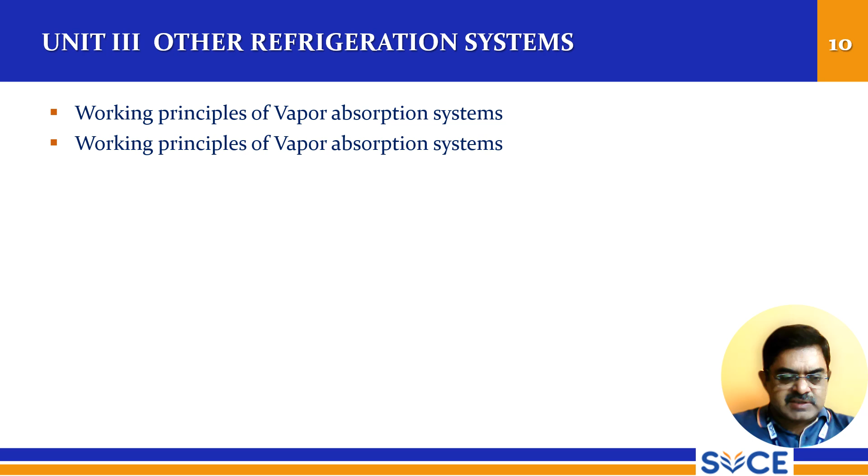So from this unit 3, these are all the topics we have seen, and now we have reached our last topic. Now we are going to discuss pulse tube refrigeration system, and this is the last topic. We are concluding unit 3 in this session today, and we will start unit 4 in the next session.

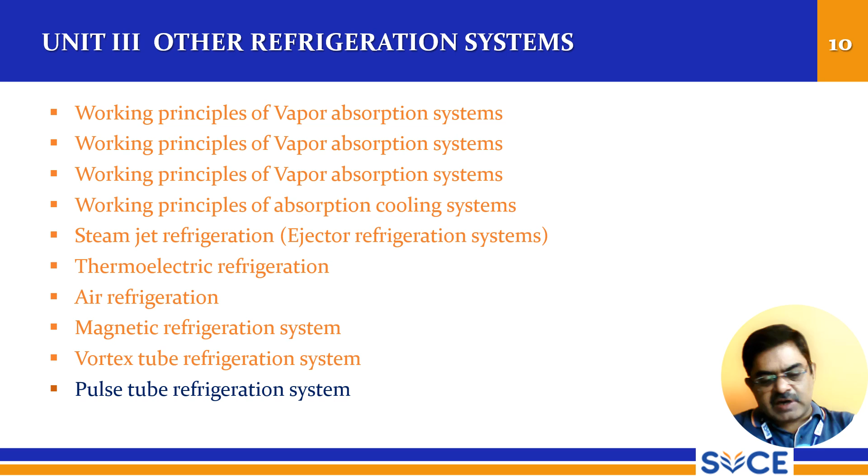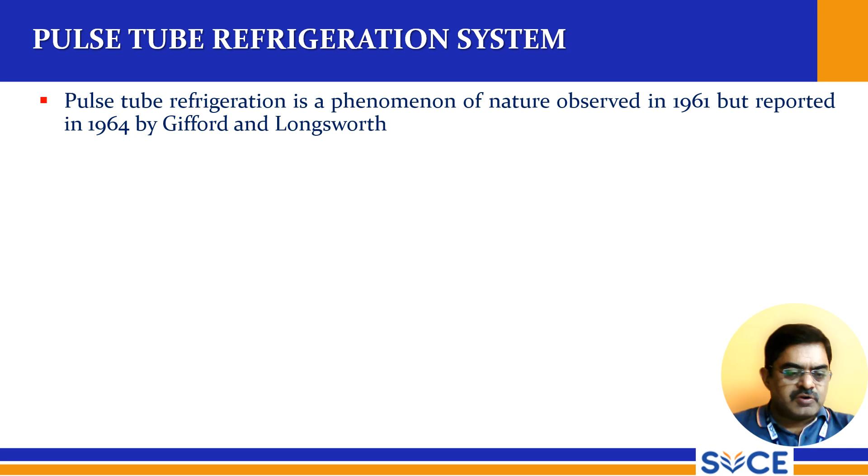So pulse tube refrigeration is a phenomenon of nature observed in 1961 but reported in 1964 by Gifford and Longsworth. This is a simple but fascinating method of obtaining low temperatures. The whole point of a refrigeration system is to achieve low temperatures, and the problem of lubrication at low temperature is basically absent as there are no moving parts. So here also there are no moving parts, like the vortex tube, so the life is also good.

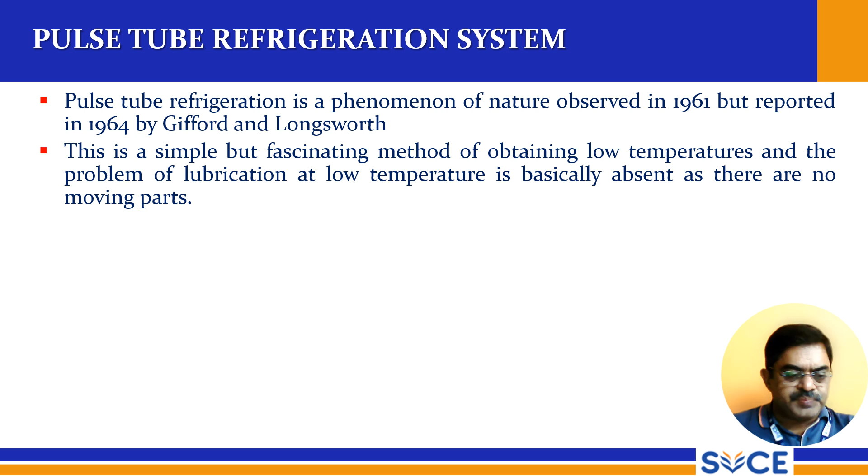So in this system, sudden expansion and release of gas are employed to get the refrigeration effect. This is a simple aspect and a simple technique. So here, sudden expansion and release of gas, this is the working principle we can say.

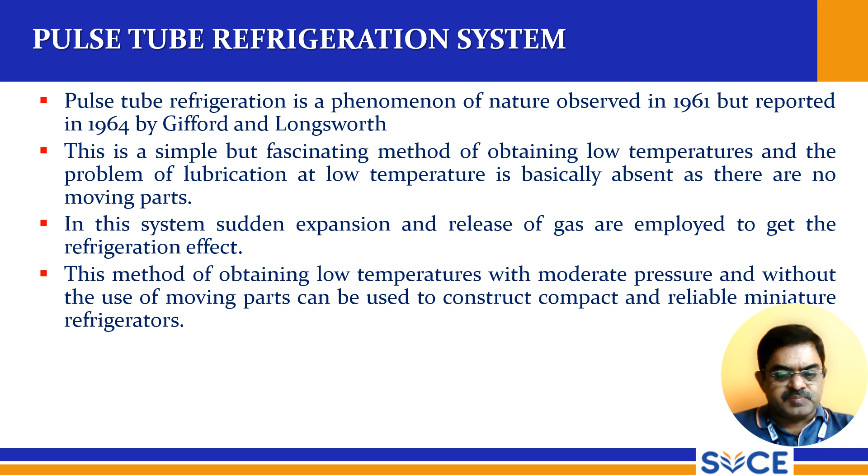So this method of obtaining low temperatures with moderate pressure and without the use of moving parts can be used to construct compact and reliable miniaturized refrigerators. So there are no moving parts here. That is another very good advantage, and it can be used to construct compact and reliable miniaturized refrigerators. So that is another very good usage.

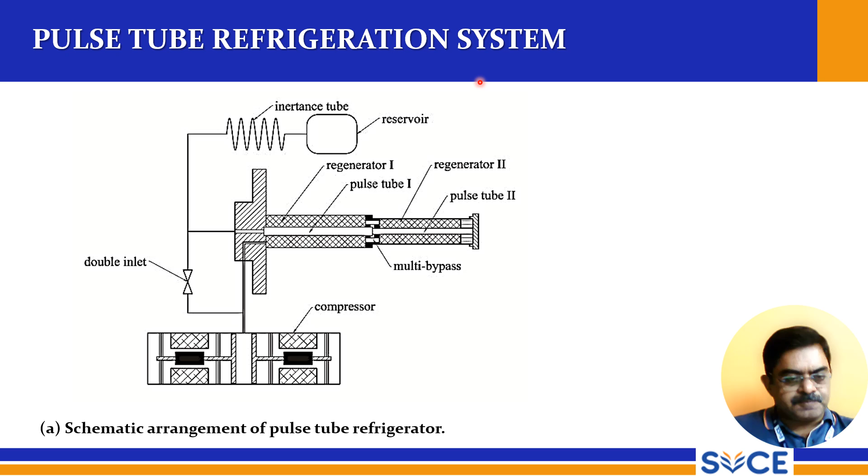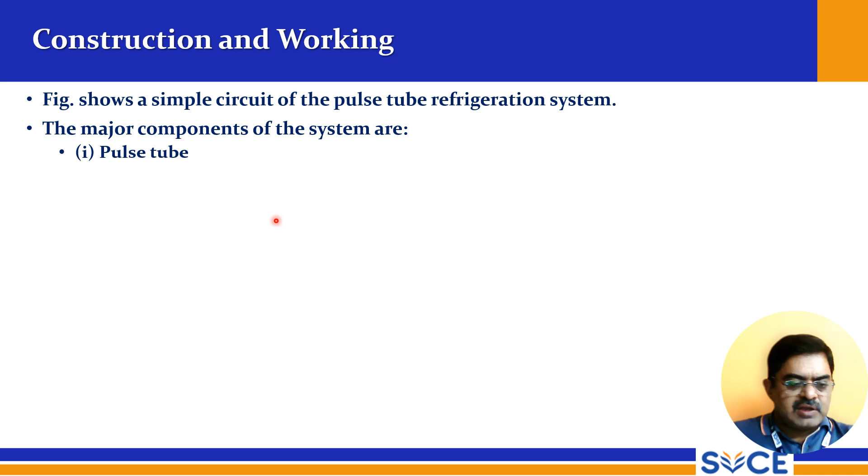So coming to its construction and working, it is very simple. The figure shows the simple circuit of a pulse tube refrigeration system. The major components of the system are the pulse tube, regenerator, valve mechanism with a drive, vacuum system, and cooling system.

The working of the system is as follows. The compressed gas is admitted by the valve mechanism to the pulse tube through a regenerator, which is cooled to the refrigeration temperature, that is the cold end temperature. This gas entering the tube acts as a fictitious piston, and subsequently the gas already present inside the pulse tube gets compressed, resulting in an increase in temperature, varying from minimum at the left end to maximum at the right end.

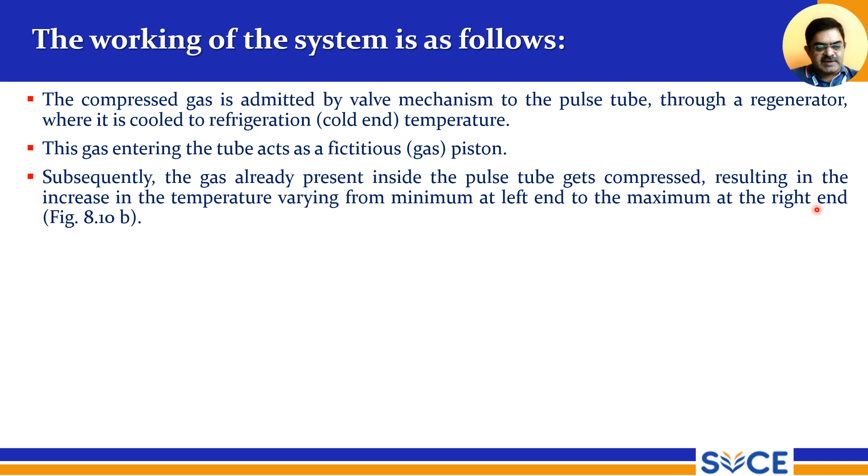So that is shown in the figure, and therefore the heat transfer to the cooling medium reduces the temperature to some value, that is Tr, the temperature close to the cooling medium. The supply of the high pressure gas stops after the inlet valve is closed, and therefore the gas in the pulse tube is connected to the exhaust with the help of the valve mechanism, thus releasing the gas that entered the pulse tube during the pressure build-up process.

So this results in expansion of the tube gas, leading to a decrease in temperature at the cold end much lower than the ambient value, which takes care of the refrigeration load. So the cycle is completed and repeated. So here it is a closed cycle type only, and now the cycle is completed and repeated.

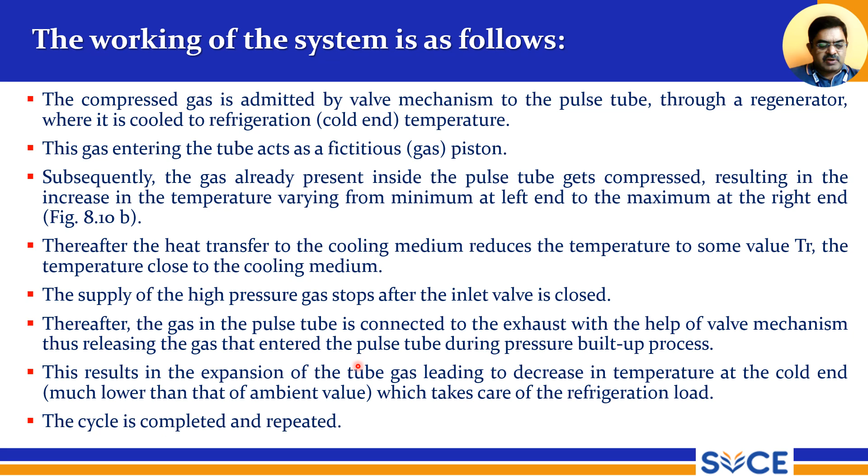Now we see its applications. Field of application of pulse tube refrigeration system. So this system is most suitable for cryogenics, where the requirement of very low temperature cannot be met even after employing a multi-stage or cascade vapor compression system of best COP. So here that is the biggest advantage, and this is more suitable for cryogenics. So it is a very important type of system.

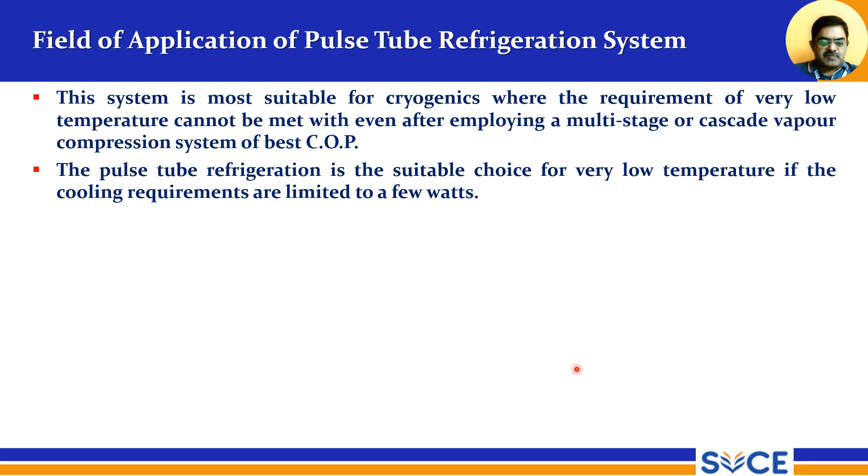The pulse tube refrigeration is a suitable choice for very low temperature if the cooling loads are limited to a few watts. So Gifford and Longsworth reported the following cold end temperatures with the cooling medium temperature of 300 K and helium as working gas at a pressure of 25 bar absolute. For a single stage pulse tube, it is 124 Kelvin, and for a two stage pulse tube, it is 79 Kelvin.

And Professor Parulekar, from IIT Bombay, reported the lowest temperature of 214.5 Kelvin with a single stage pulse tube without heater load at the cold end, using air as the working medium. So this is another research view that came into the picture. He is a professor from IIT Bombay, and he has concluded this.

And he reported the lowest temperature of 214.5 Kelvin with a single stage pulse tube without heater load at the cold end, using air as the working medium. So this is a finding from IIT professor Parulekar, and this is the topic about the pulse tube refrigerator system. And students, now we are completing unit number 3.